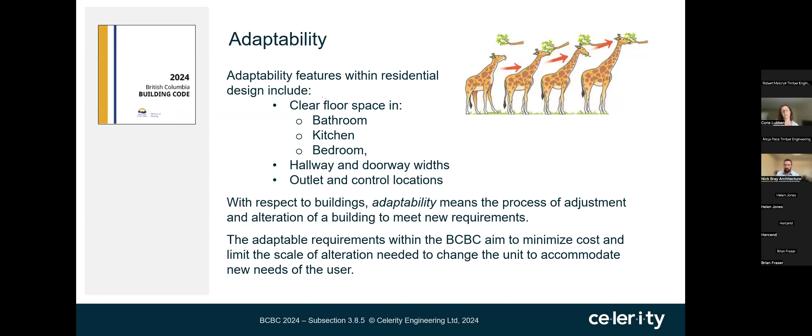The clear space is focused in bathroom, kitchen, and the bedroom. We're looking at hallway widths, door widths, and locations of outlets and controls. So again, the adaptable requirements aim to minimize costs and limit the scale of an alteration needed within the unit to accommodate the user.

So the adaptable dwelling unit requirements can be found in subsection 3.8.5. They are applicable to one-story dwelling units served by an accessible interior public corridor, accessible common building entrance. And so what this means now, moving forward, as of March 10th, when these become applicable, 100% adaptable units will really be required in residential apartment buildings over 2 stories or residential buildings larger than 600 square meters.

So this is a significant increase in impact on our designs. These micro suites we have been seeing may no longer be feasible just based on this new clear space required throughout.

I do want to emphasize that these requirements do not apply to detached houses, semi-detached duplexes, triplexes, townhomes, row homes, and boarding houses. There is a requirement for those types of buildings to have at least 1 bathroom with walls reinforced to accommodate the future installation of grab bars. But aside from that, it's not the intent.

I want to highlight that the requirements within the adaptable units, they don't align with the VBBL at this time. We know the Vancouver bylaw is coming up with a new edition shortly. We're hoping that they will align, and that's what we're feeling, but like everything, we'll know it when we see it.

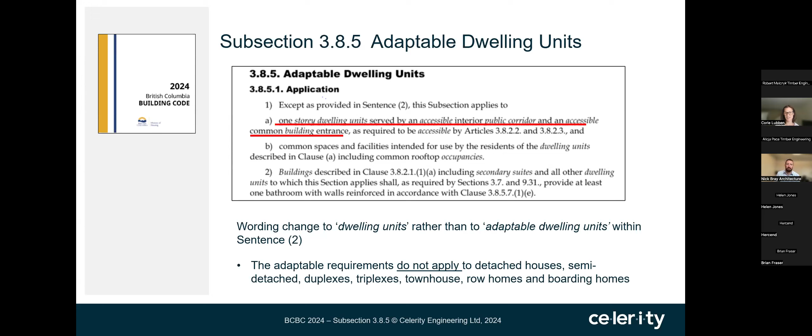So then we move into the construction requirements. There's not a significant change here. This article simply states that the construction of adaptable dwelling units will conform to the subsection and the accessible requirements. What we see is an inclusion of clarification. So all this clear space that's required for different parts of the building is now permitted to overlap.

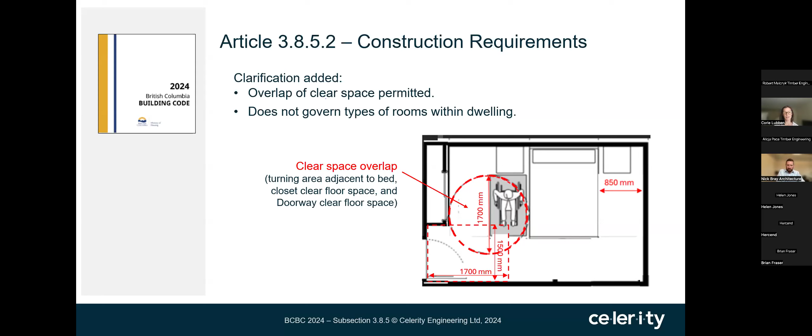Within this article, there's also a little bit of clarity on what rooms. It doesn't require specific rooms in a dwelling unit, just states if there are rooms and they're within here, they should be designed to be adaptable.

Next is the building access requirements found in Article 3.8.5.3. This one states that access is going to be provided to common areas, spaces, and all common interior and exterior paths of travel serving the adaptable dwelling units. Anything that's not intended for residents, common spaces and paths are excluded from this.

There is an inclusion for increased lighting to 50 lux in the floor area for a common corridor and passageway. This exceeds the 10 typically provided. Also provision for special outlet boxes in the adaptable dwelling units, just for the provision of future strobes.

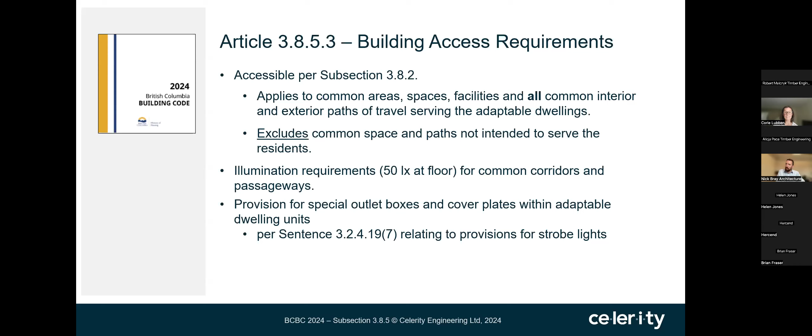Doorways. At the next one, we see a revision here with the doors. This is consistent with the rest of our design requirements in 3.8.3, but the 850 clear width is required not only at the entrance door, but with interior doors as well. And just on the top of the screen on the right, it reminds us how we measure that clear width. It is the clear opening, so from the stop to the open part of the door.

As with all doors, we need a clear space around them. This article references and is consistent with the design requirements in 3.8.3.6. So if it's a pull door, then we need the 1500 millimeters by 1700. As you can see in the picture, this clear space, the orientation isn't fixed.

As we move on to the push door, the orientation is fixed. We need the 1500 perpendicular to that door, and then the clear width parallel is 1200. There's a provision that you're allowed to reduce these widths if a power door operator is provided, or even just provisions for a future install of one. And you can reduce it to the 1500, still perpendicular, but we're reduced down to a meter parallel to that door.

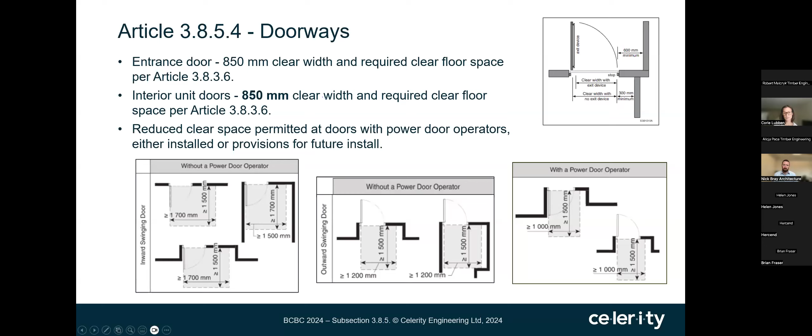And then we have some hallway and corridor requirements. This is a new inclusion into the adaptable unit requirements. So it defaults back to the requirements within 3.8.3, which is our adaptable or accessible width of 1 meter. This was an interesting inclusion, and we don't see it a lot throughout other buildings because we're governed by our egress width of 1100. But here with the adaptable dwelling units, these requirements apply within the suite.

So we will be looking at that 1 meter for corridors and hallways. There is an allowance for that to be reduced to 850, and that's just for small indentations of 600 millimeters or less.

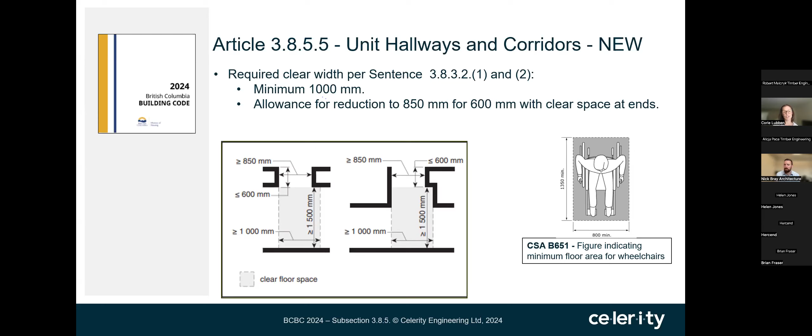Bedrooms is another new one. It requires that 1 bedroom in an adaptable unit be provided and consistent with the requirements in the code. This bedroom should be designed to accommodate a bed that sleeps 2 people. Consistent with our occupant load, we have 2 people per sleeping room. So a bedroom designed to be accessible should accommodate a double bed.

The requirements specific to the bedroom: looking for a clear space of 1700 millimeter diameter or 1700 by 1500 millimeter clear space. The wording within this article is a little vague, and it says it could be adjacent to the bed. When you further read into the notes, it seems like the intent of this is to help with the transfer into the bed. So adjacent to the bed seems like a logical and helpful location, but again, that is not specifically written in the code.

The next requirement for a bedroom is a clear pathway of 850 wide. And this is not to be obstructed by furniture, just to provide use of a bedroom. This would be applicable especially if there was a window or something on the far side of a bedroom. Everyone needs to functionally use that space.

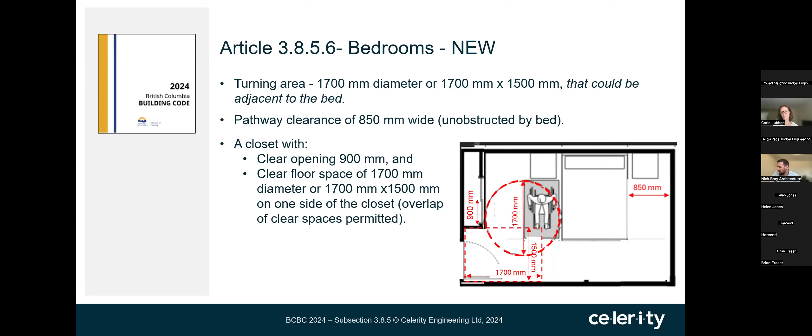And then the last requirement within a bedroom is closets: the clear width of a closet opening, 900, and then a clear space in front of it, similar to that 1700 millimeter diameter or the 1700 by 1500 millimeter open space. Again, this references our allowance for overlap. And as we can see, this is a large area provided. So overlap of those spaces is permitted and definitely beneficial when designing a room.

Bathrooms. The design of a bathroom often requires a little bit of extra attention. We have more plumbing, we have different fixtures that come into play and replacing needed. So the goal here is just if we have to retrofit a bathroom, that we can do so without major renovations. So the requirements within this article lean towards a clear lateral transfer space beside a toilet. Again, more room. We have the location of the water closet within a proximity to the adjacent wall. This is where we'll have the future grab bar locations.

The other requirement is for plumbing systems to accommodate future install of an accessible sink, an accessible shower or tub. And then also these are not permitted to impede the use or space of other fixtures within. So plumbing systems, as clarified in the notes, addresses the water supply, drainage, and venting systems. So again, we just want to be able to replace the systems without major impact and redesign.

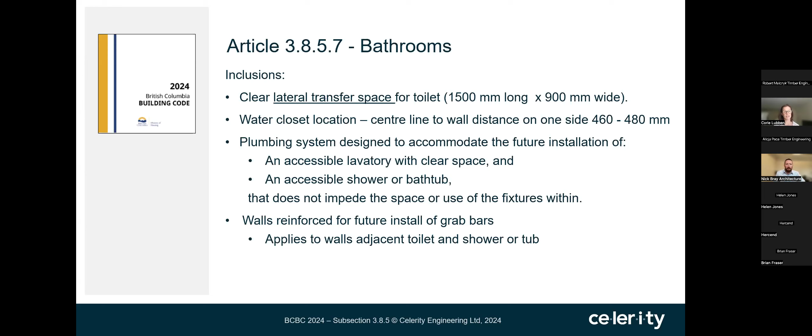This one has been brought to our attention, especially drains, and a drain for an accessible bathroom sink sits a little bit different than a drain for a shower or bathtub. So these things caught early and designed early can really be beneficial. The last requirement is that we have the walls that are reinforced for the grab bars, and that's adjacent to the toilet, as well as a shower and tub.

And then we have kitchens, another area we need to have accommodate adaptable requirements. There is a requirement within here for the sink and cooktop location. It says adjacent or with a continuous counter. This one is in the code just for usability. I'm not sure how strict we are on this. We have not seen these type of requirements for placement of these 2 features in a kitchen.

No, the CSA B651 doesn't specify the location of these two fixtures. So if you had a parallel kitchen, one could be on one side and one on the other. But based on the code, adjacent typically means touching. So we're just going to be conservative and assume they're all going to be on one side, one counter, either beside one another or adjacent.

The other revisions within a kitchen: we need clear space. Again, back to the 1700 diameter or 1700 by 1500 millimeter. This is usability within the kitchen. We want it designed to accommodate the future install of a kitchen sink. So here the focus would be on knee clearances and locations of the plumbing, vent, and drain.

When we talk about kitchens, we often have a kitchen that includes that popular design with an island. And the question is, is that still possible? Well, I guess that kind of comes down to the interpretation between fixture and furniture. So in our opinion, a design that includes an island is definitely still possible, but we would want it more to be on the side of furniture, so it could be removed and not really impact.

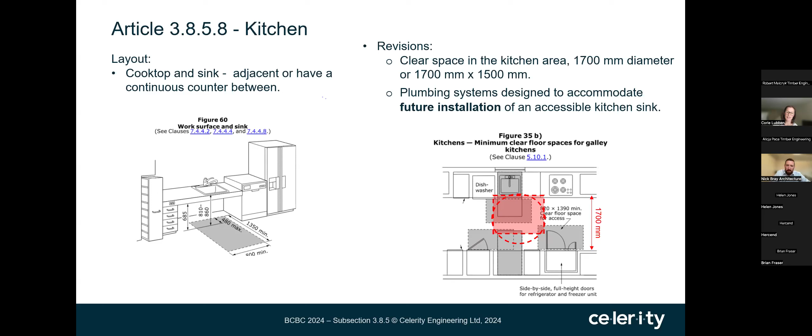So you wouldn't have appliances or sinks or plumbing or electrical stuff that would go to it. We'd have finished floor underneath so that it could be removed. The clear space would be provided and really not impact the functionality of the kitchen. Again, this one's open for interpretation, but that seems to meet the intent. So a furniture island would be permitted, not necessarily a plumbed-in and fixed criteria.

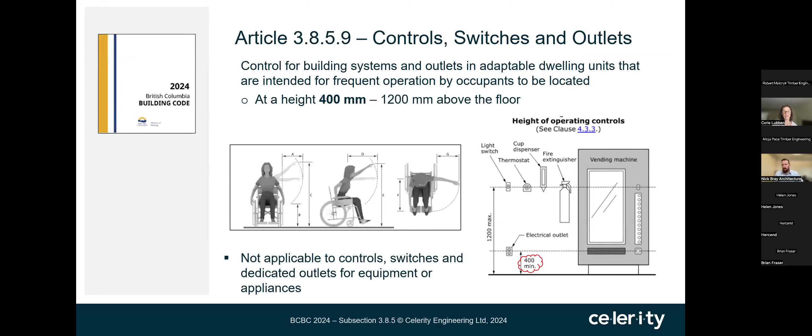The last requirement within the adaptable units falls on the controls, switches, and outlets. There is really no significant change here. Our reach, and everything we have lowered, at the minimum location is 400 millimeters. It used to be 450, pretty minor, and up to 1200 millimeters above the floor. Again, this applies to things that we're using. It does exempt controls that are dedicated for equipment or appliances.

So as we conclude the adaptability requirements within 3.8.5, before we move on, I just wanted to bring our attention to these other design aspects that are nice to consider as we're moving forward. One is the window location. Specifically in the BCBC, there's no requirement for a window location, no reference, nothing, but we do see within the CSA B652 adaptable dwellings a reference that one window should be provided in each room, located not higher than 750 millimeters from the finished floor, with an exemption to the bathrooms. And then this requirement is equally reiterated within the VBBL.

We have one window. This is within the living room. It's located 800 millimeters above the finished floor. Again, it's not within the BCBC, but it is a functional and kind of a large item if you were in a unit and you wanted to make a revision. So these are things to consider as we move into design.

The other thing is patio doors often bring up another issue. It's a gray area. There's no requirement for it to access specifically right over into the balcony or patio, whichever the unit has. Although looking at patio door threshold and swing type early on may just simplify a unit and be designed for all.

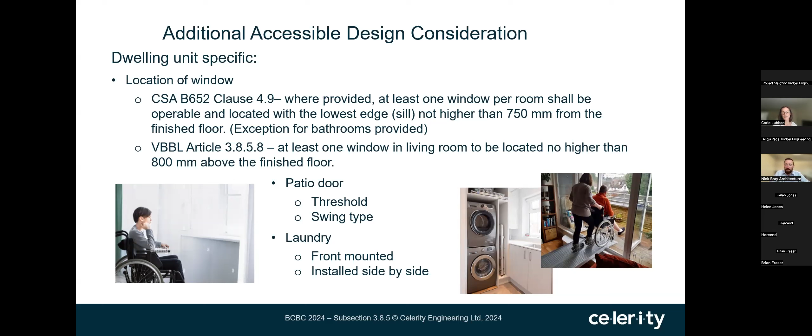And now I'd just like to reiterate all the accessibility design standards and references that are out there. We know now that we have the CSA B651 2018 edition, which is the accessible design for the built environment. This one is now included in the 2024 BCBC. It's a direct reference, so it does make that standard now enforceable. I do want to highlight there's a new version of the B651? There's a 2023 edition. This one didn't quite make it into our 2024, so it gives us a chance to look forward and see what's coming.

This table on the left, I just highlighted some of the clear space requirements and the differences. As you see here, the turning space that's bubbled on the far right is 2.1 meters. So right now, our designs incorporate this 1700. So when we feel that that's big and we're trying to incorporate it into our design, just remember that based on design and feedback from users, the 2.1 meters is preferred. So just giving that 1700, we shouldn't grumble about giving up extra space.

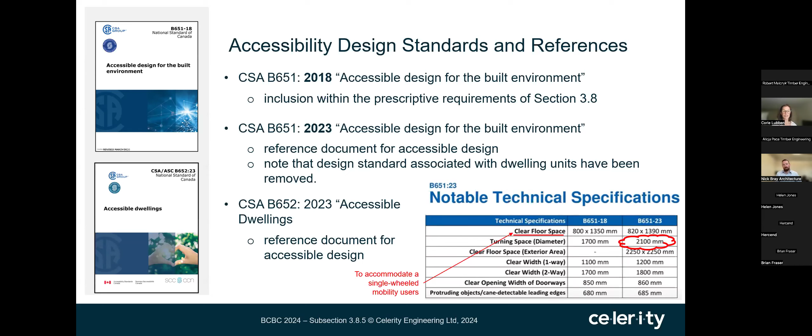Anyways, within that, the 2023 edition has moved all requirements associated with accessible dwelling units into a new standard. That's the B652. So that's a new standard. Again, these ones are just standards, so they're used for guidelines and not enforced.

And then before we close, I just wanted to touch base on these impactful changes within the accessible requirements. The dwelling units are required to be served by an accessible path of travel, both interior and exterior. Within article 3.8.3.2, accessible paths of travel, we have a new requirement addressing long corridors. And it definitely depends on the width of your corridor.

So right now there is this new inclusion for a turnaround or a mobility zone. That comes into play when we have a corridor that's more than 12 meters in length. And if the corridor is not 1500 or more, we do need to incorporate a turning zone at the end.

Once we have corridors greater than 24 meters, we actually don't care about the width of that. We need this turnaround zone or maneuver zone regardless, and that has to be incorporated at intervals not greater than 24 meters. And it's a 1700 by 1700 millimeter space.

Secondly, I just want to highlight the changes in the exterior walks. We have an increase in our width required on the outside of the building. We're looking now to provide 1600 millimeters. There's added clearances around entrance doors on the exterior where we go to that 1700 by 1700 millimeters.

And we do have a direct reference here where we are required to comply with the CSA B651 requirements for exterior walks, and the provisions there include a broader scope than previously within the building code. We're looking at overhead obstructions. We're looking at separations from vehicle walks. We're looking at specific requirements for tactile attention indicators and where bollards are. We have separation distance between them.

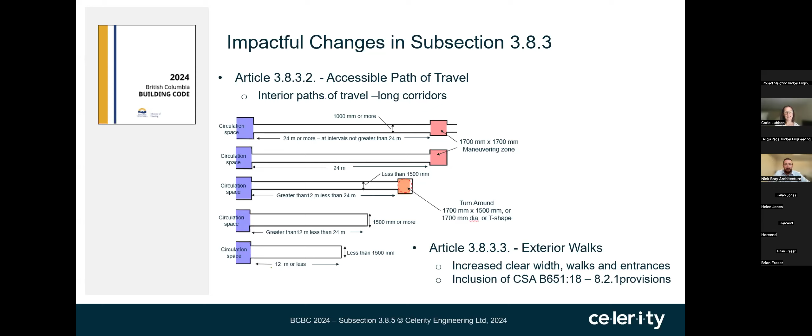Just a lot more things to incorporate, and this isn't to go over them all, but just to be mindful, we need to dig into these deeper as we move forward. And I think that sums that up for a quick deep dive into the adaptability requirements from our end. I'm not sure if we want to take any questions now or if we're just going to leave those to the end. We've got 5 minutes now to just talk through some questions here that we have.

But before we get into that, I just want to say that there's still a lot of things, obviously, that we're unclear about that we need clarity on from BSSB, from the BC government. And also we can only present what we actually know to be written in the code right now. But I know, for example, there has been talk about the requirement for a double bed and the requirement for a space on both sides of the bed.

And I'm not sure if it's been confirmed or not, but it's certainly been discussed, talk about that only being required on one side of the bed and it not necessarily being a two-person bed that is required. Now, again, we can only really present what has been written in the code or confirmed at this point. But just be aware that we are seeking clarity on a number of other issues, and maybe we can keep you updated with those items.

Just to start on the questions here, a question from Tina: does the BCBC include requirements for windows that are accessible? For example, latches for swing windows at the height that a person in a wheelchair could reach to provide fresh air to a room. As we said, the BCBC doesn't have a requirement specifically for windows. The VBBL and the CSA B652, who reference a window in their location, do say operable. So if it's an operable window, that leads to the fact that whoever is trying to use the window would be able to use its operable features.

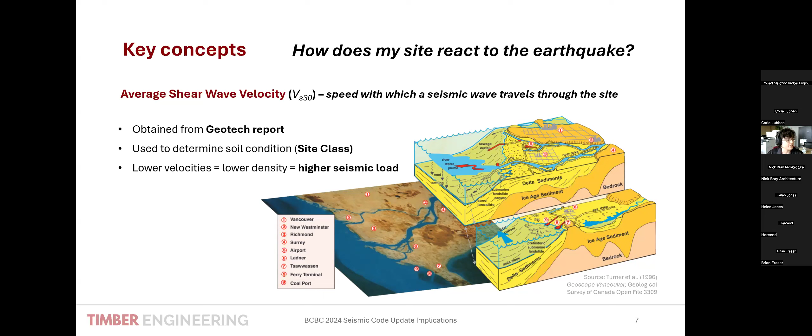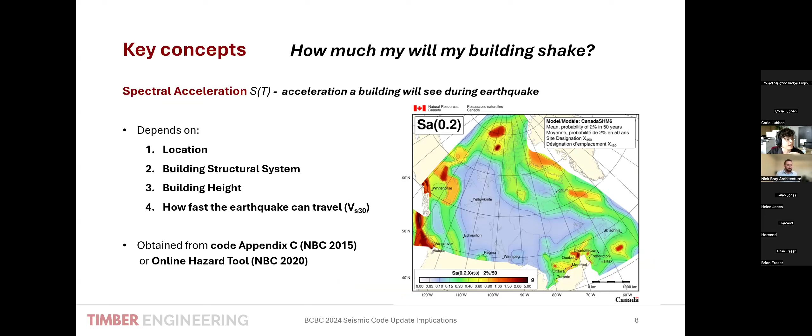Then the second important concept is, of course, how much will my building shake? This will depend on the location within the country, with the higher seismic zones being closer to the potential epicenters. It will also very much depend on the structural system, the height of the building, and the concept I just introduced, how fast that earthquake can travel through our site. Typically, all of this is encompassed in our spectral acceleration.

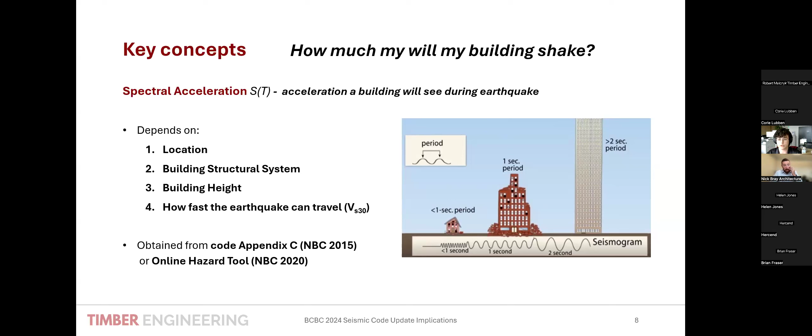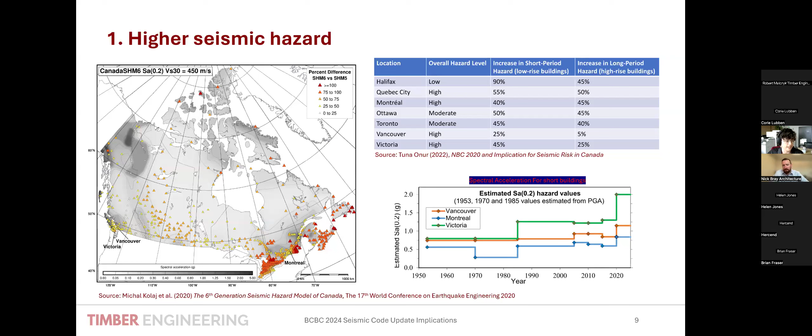And that value of spectral acceleration, historically, we've been able to access from Appendix C, but now from the 2020 NBC and consequently BCBC 2024, this will be done through an online hazard tool. Just to zoom in a little bit on the changes to the seismic spectral acceleration values. This is the map on the left-hand side where you can see all of Canada. But of course, we're focusing a little more on our local BC.

And as Robert already briefly mentioned, for the two most important cities for us locally, especially seismically, Vancouver and Victoria: a 25% increase in spectral acceleration for low-rise buildings in Vancouver and 5% for high-rise. For Victoria, this is 45% for low-rise buildings and 25% for high-rise. And just to underline, these spectral acceleration values directly impact the calculated loads on the building.

I also would like to highlight that this, as you can see at the bottom right corner, is one of the biggest peaks that we've seen in those ground motion models in terms of hazard values throughout the years. And therefore, it is going to impact the way that we design quite significantly.

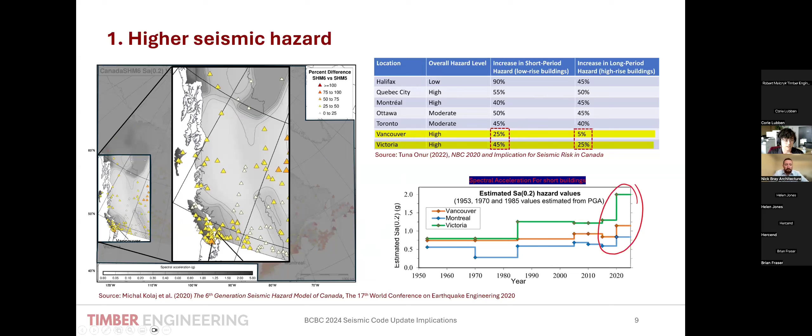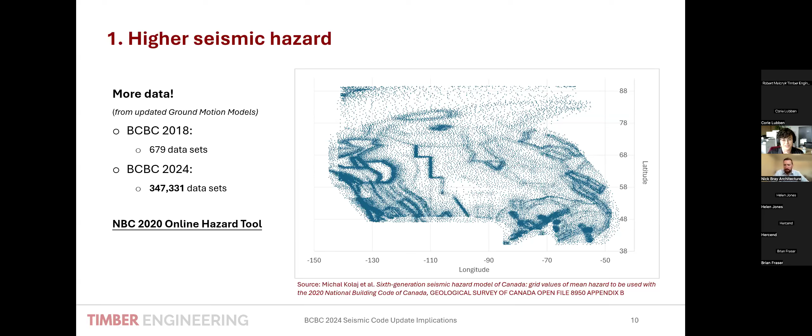Also, just going back to that online hazard tool, the ground motion models are going to be much more site-specific now. We used to have just under 700 data sets, which were in that appendix that I've mentioned. Now we have over 300,000 data sets. So there will be varying very much, not just between the cities, but within the city. So it's going to be very, very focused. And this is why we have the online hazard tool instead of it being an appendix, because it is incredibly hard to fit 350,000 data sets in an appendix.

Just to show, for example, how it will work for an example design, you can see on the left-hand side here, this is an example building, our office. It's localized in Vancouver, and despite the changes being summarized as a 25% increase for Vancouver in general, when we localized for the site specifically, you can see that recalculating between the old and new hazard values, we will see around a 13% increase in those base shear values. So it is very important to understand that we will be needing to know exactly the site specifics, and we can preserve a lot of efficiency of the design in that way.

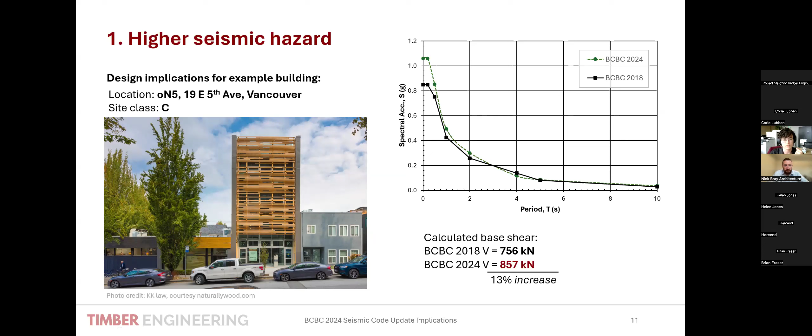In our building, for instance, this is foreshadowing a little bit to what Christian is going to talk about in a minute. We already have designed this structure for performance that is going to be damage-free after seismic events, thanks to the use of the technology called Tectonus, which is installed as hold downs in our shear walls. And it allows for recentering of the structure after a seismic event, especially at the lower seismic events that are more likely to happen more often.

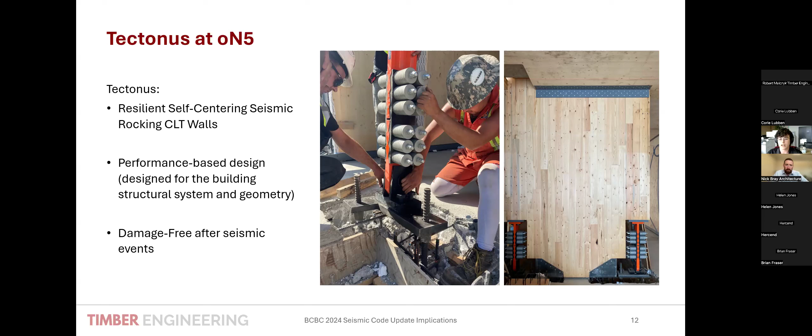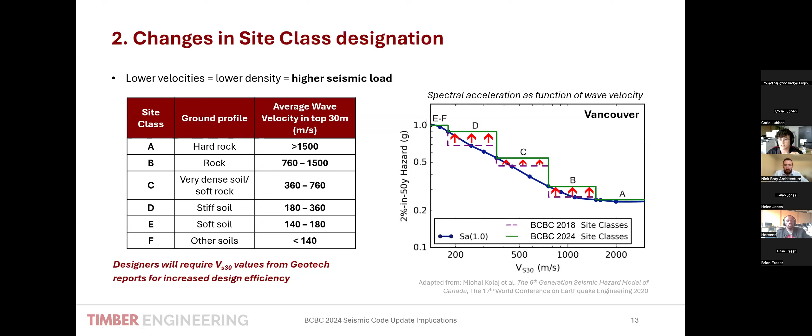Within the bracket of a site class, we more or less got an average value of the spectral acceleration. And now it's going to be the worst value. So if we just say we're designing for site class C, we're going to get the worst possible design value out of the entire site class. And this is exactly what Robert mentioned, that in order to preserve that efficiency of the design, hiring a geotech early and being able to know the exact shear wave velocity for the specific site will allow us a more efficient design. And now I'm going to pass on to Gersand, who is going to talk more about the upcoming changes.

Yeah, thanks, Alicia, for the introduction. I'm Gersand Bidibita, and I will just take you through the last remaining portion of the presentation today.

So based on what Alicia and Robert had mentioned earlier on in this talk, it's worth mentioning what exactly we have been doing so far. As Robert mentioned, from when seismic design really started in the early 2000s up to the NBC 2015, what we have been doing so far is really just to design for a single performance objective. And that objective has really been just life safety, right? So we've been designing buildings, as the picture on the right-hand side is showing, just to make sure that those buildings don't collapse. So it's for collapse prevention and to try to save lives. And with that, the code has never really given any other additional requirements except when you have different structures, like high importance buildings or post-disaster buildings.

There are those few key points that you have to consider, like increasing the load using the importance factor, or reducing the deflection of the building as it shakes with a reduced drift value, or basically making sure that your structural system is regular or efficient or symmetric in order to understand really what is the load path. And these are really just additional key points that the code has given, with no additional restriction or no additional analysis that has to be done except making sure that the building does not collapse.

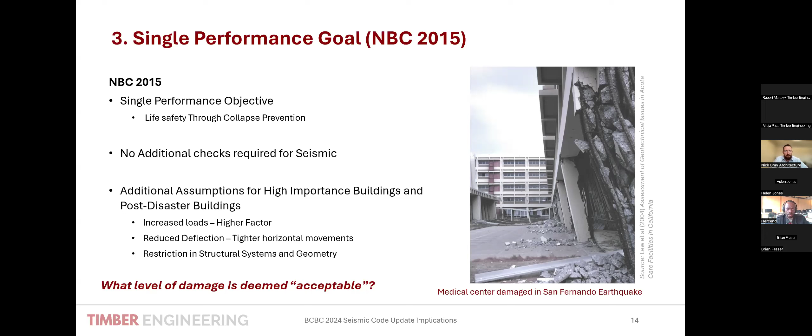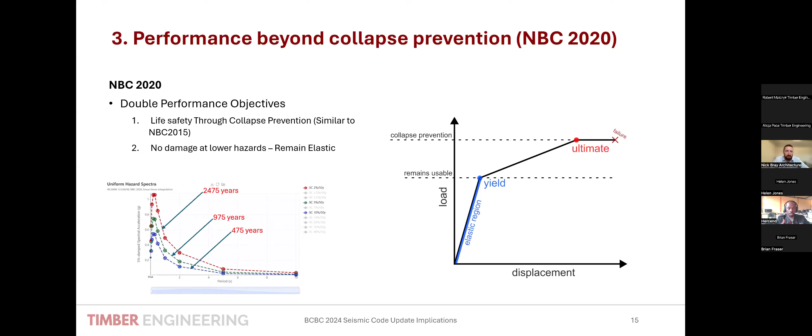The first one is to make sure that at a return period of 2,475 years, which is the 2% in 50 years probability, your building does not collapse. But at any seismic activity lower than that, at 975 years or 475 years return period, you have to be sure that your building remains elastic, especially if it's a post-disaster building or a high importance building. Next slide, please. So what does that really do to us in terms of design?

So now you are seeing more restrictions, more limits, or now you have a second performance level that you need to meet. And as Robert and Alicia mentioned earlier, you actually have even higher forces that you have to design for. What it means to us in the building industry is that now you have to really try to target a much more regular building, a much more symmetric building.

And by symmetric, these are the two examples that we find better describe this word: you need to try to make sure that your lateral load resisting systems are located in such a way that you have a proper load path. And by proper load path, it means that the loads go from the top, the roof, all the way to the foundation. So on the left-hand side, you have the cores, for example, in gray that we highlighted there.

And the blue lines are actually drag struts. So that means that they collect the forces from the outer side of the building and bring them back into the main side of where the lateral load resisting system is. And that is pretty symmetric. You can see that the two cores are located right at the position that creates a better load path for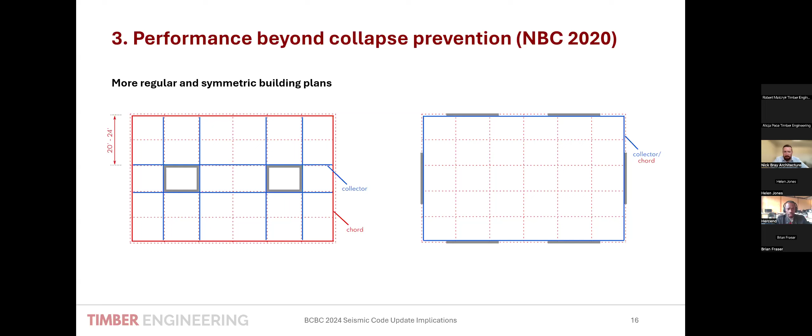And on this slide, the main important thing to remember here, and Robert will also mention that on the next slide, is that with those higher forces, with those higher performance objectives required, you actually have to try as much as possible to avoid any transfer in terms of the lateral load resisting system. So try to have your cores, your shear walls, your braces very aligned from the roof level all the way to the foundation.

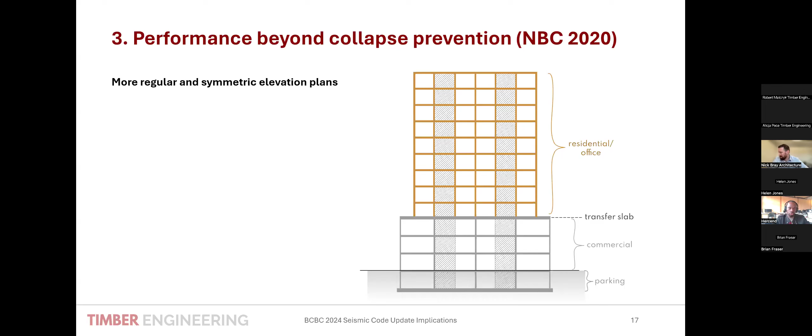This way you are actually optimizing your structure and making sure that your structure will perform better and will avoid any increase or cost premium that might be caused by shifting the lateral load resisting system. So these are the main things to remember about how performance will be impacted structurally from 2020. Next slide, please.

So the other important point for us to remember here is the introduction of CLT as a shear wall. What this means to us is that, yes, we have seen CLT buildings for more than a decade now here in North America and in BC. And so far, we didn't really have anything in the code that specifically gives you the Rd and Ro factors for CLT shear walls.

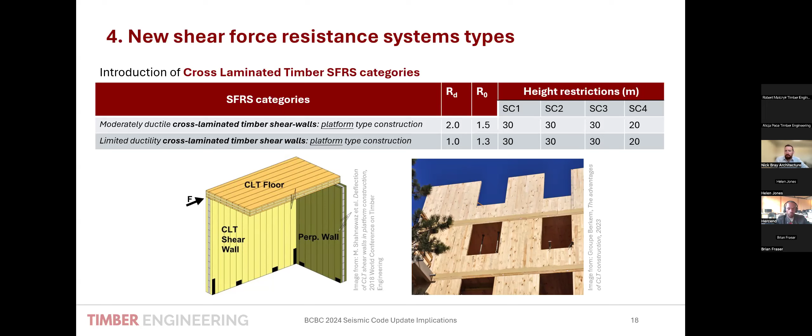So now it is in the code, which means that we can freely design CLT shear walls without having to go into alternative means and methods or additional analysis. But that being said, what is in the current code so far is mainly limited to what is called platform construction. Next slide, please.

So platform construction means just like we design wood framing, right? You have the walls below supporting the floor above, which can be used as a platform to allow construction of the next floor. On the left-hand side, you can see a platform construction, but most of the CLT shear walls that we've been designing so far, especially here in North America, are more the balloon type of construction, which is on the right-hand side.

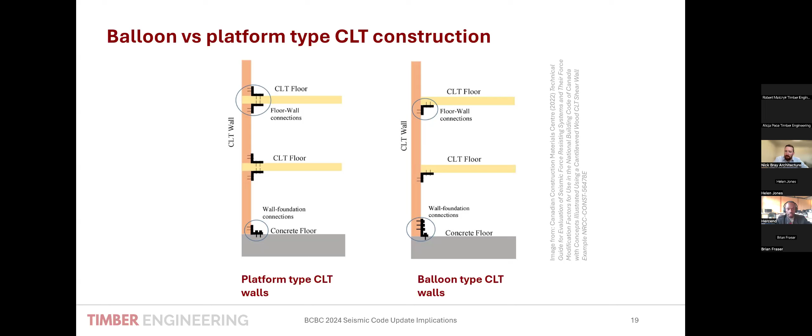Although this is yet to be in the code, there is a lot of research currently being done at universities and different institutions trying to push this system forward to be able to account for it in the next upcoming code. Next slide, please. So that was it, and I will pass it to Robert to finish off the presentation.

Thanks. So one more time, higher seismic hazard will increase the forces. There will be a very large increase in Victoria, 45%, and 25% in Vancouver. It will be the low-rise and mid-rise buildings that will be affected most. The increase for high-rise is 25% in Victoria and just 5% in Vancouver. The site class designation is really important.

We used to only get site class B, C or D from the geotech. Now it is the shear wave velocity that we will be asking the geotechnical engineer for, and we need this right before the design. There were many projects I have been involved in where we just assumed site class C or D based on what we did before in the area, and the geotech was hired later just to verify the allowable soil bearing pressure. Now this will not be economical, so we will be changing that.

Performance beyond collapse prevention. This is for buildings of higher importance classes, so schools and community centers. They will be designed to not have too much damage. And then the new shear force resisting systems, CLT walls in platform construction, will be game changers. They will be mixed with wood frame, and they will be providing these new solutions. Next one, please.

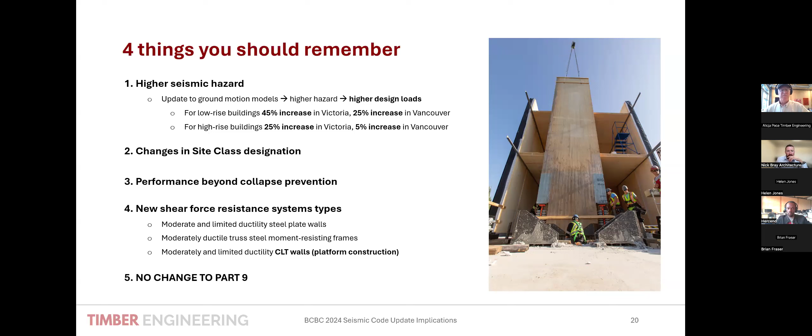So what does it mean one more time? Buildings will be more regular. They will be more lined up. They will be more like we used to do buildings 100 years ago. Walls, there will be more shear walls. Transfers and irregularities that were so easy in wood frame buildings will become much more expensive. And then other systems will be mixed into this.

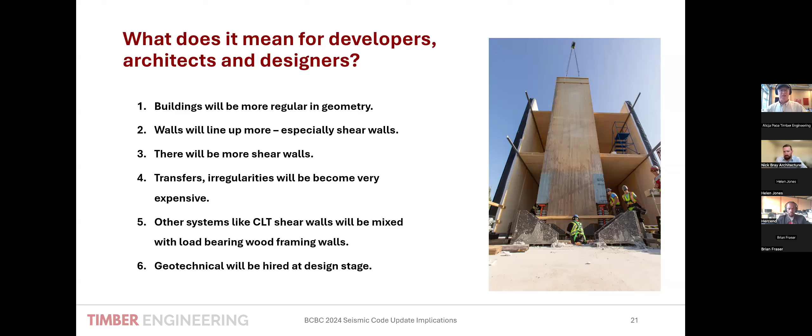And what's really important, work with the geotechnical at the design stage. We would like to stress that these are the changes that will need to be worked together with engineers, with architects, right at the concept stage. You know, we all started working on projects, those of you that have lots of experience, where we would just get architectural design and then put our shear walls in. This will become not an easy way to design, and it will result in buildings that are not optimal, which will result in higher prices. So more and more towards this early work together between architects and engineers to address these seismic changes.